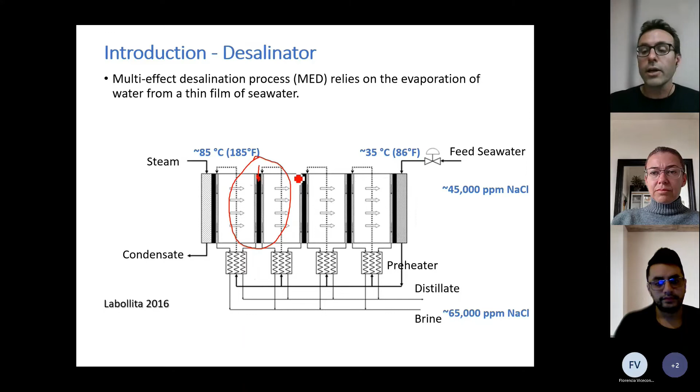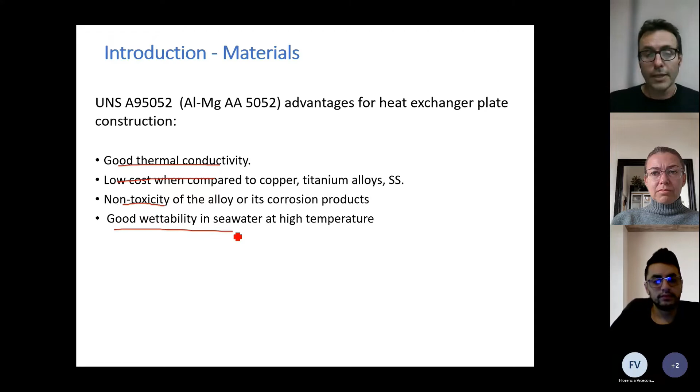And the alloy selected, besides being corrosion resistant, must have good thermal conductivity, so it can transport this latent heat of evaporation. It must have a low cost, especially when compared to other candidate alloys. The corrosion products cannot be toxic because you're supposed to be able to drink this water at the end of the day. And it must have good wettability in seawater at high temperature, right? Because this film of distillate and brine must be stable. So this aluminum fulfilled all those requirements.

And there were also some favorable papers that said, considering different aluminum alloys, it had the highest resistance to seawater corrosion, especially because it has no copper. Aluminum doesn't like copper in terms of corrosion. It has a lower amount of magnesium compared to alloy 5083, which has a higher strength. The lower amount of magnesium means this precipitate doesn't form, and that's good news because that precipitate, in some cases, causes intergranular corrosion.

The feed seawater was going to be deaerated. That is good news for aluminum. And considering all these details of the material, the fact it doesn't have much magnesium, if you go to the literature, it has good performance in service experience and pilot plants. But the question still was, what about all the crevices that this desalinator will have? Because each one of those plates I mentioned in the first slide was connected to the other one by gaskets, and all those gaskets form crevices on the material. And when we went to the literature, we couldn't find any results for crevice corrosion of aluminum at high temperature. And when you have an unknown, all of us who did a PhD know we have an opportunity.

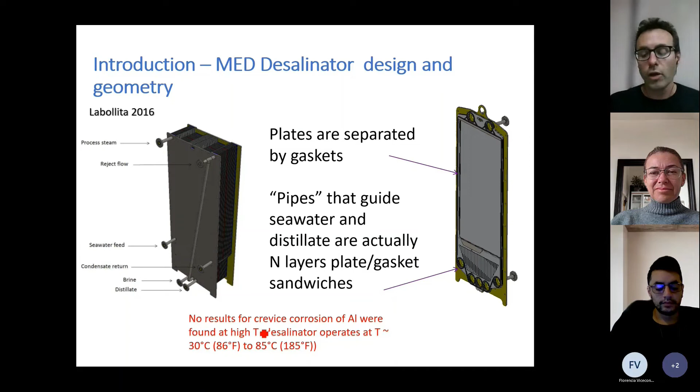So the focus of this research project was tailored to find the effect of those gaskets that form crevices on aluminum corrosion. To do that, we did some cyclic potentiodynamic experiments, and our sample was made specially so that it mimics the service condition. We used O-rings to simulate the gaskets. Those O-rings were fixed to the aluminum plate. The aluminum is here, and here you have the crevice. Here, and here you have the crevice. Then you have a nut, which is tightened with a bolt here. And if we are careful and measure this distance, and it's always the same, then you have the same severity of the crevice each time.

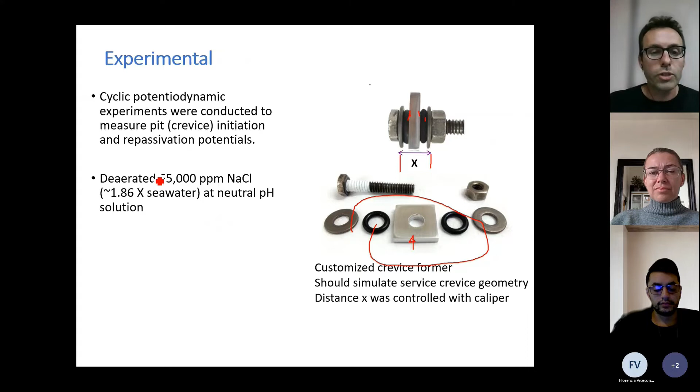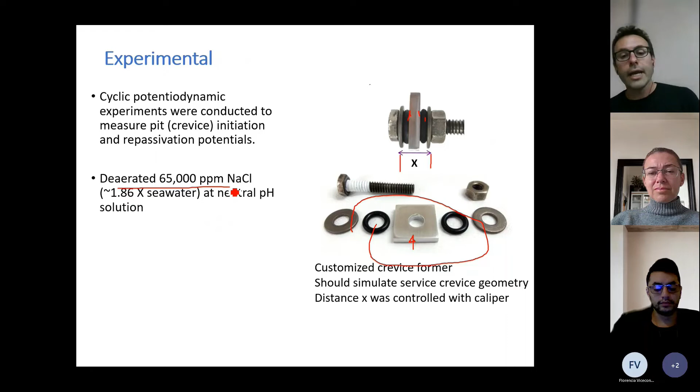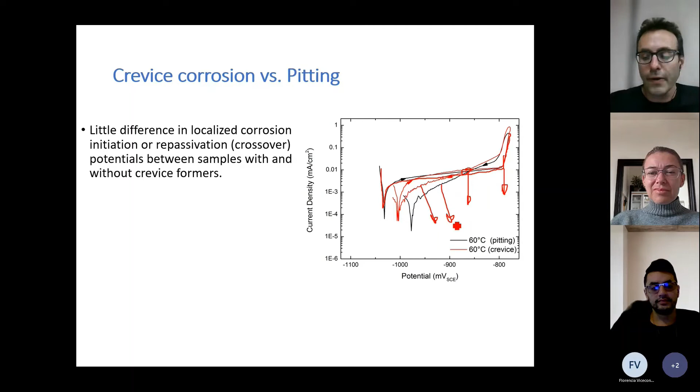And something that is apparent in the experiments we did is that there was very little difference in localized corrosion initiation or repassivation potentials between samples that had or did not have a crevice former. With crevice would be the red lines, and without crevice would be the black lines. And I'm sorry I used red and it all looks bad right now. But the takeaway point from this slide is that with or without the crevice, the electrochemical behavior is very similar.

So when we looked at the samples in the scanning electron microscope, what we saw is in the figures here at 30, 60, and 85 Celsius. After a cyclic potentiodynamic test, which is a very harsh test where you are polarizing your sample at a very high potential, what we see is initiation, but just at the boundary between the end of the crevice and the environment. So we didn't see any very big localized attack underneath the crevice, which was again good news for us.

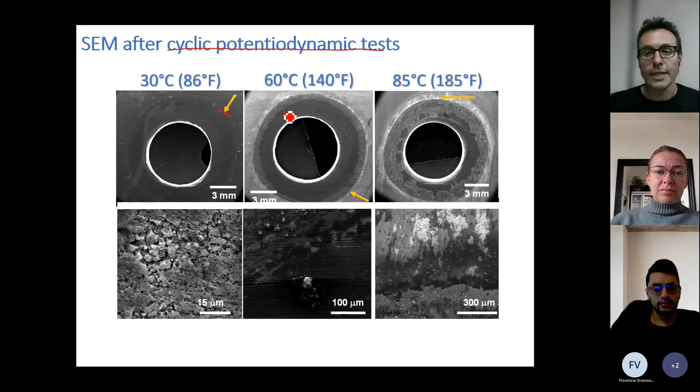So bad things happen with aluminum. I said aluminum doesn't like copper. So what we did was on purpose, we added some copper, just 5 ppm, and did the experiments under aerated conditions. And what we saw is that even at the open circuit potential condition, when you have copper and you have air, the open circuit potential goes all the way up to values close to the breakdown potential, measured potentiodynamically.

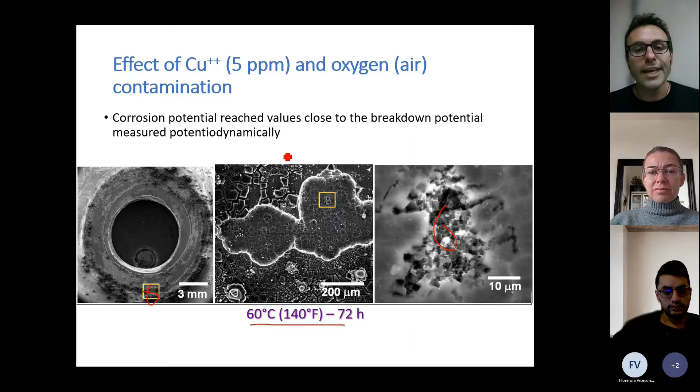And if you go and take your sample and watch it in the scanning electron microscope, what you see is what we show here. So we have attack underneath the crevice, and we see crystallographic pits here. And this was done at 60 Celsius in 72 hours. So the takeaway point from this slide: don't let copper ions get in contact with aluminum. Aluminum doesn't like copper ions.

So now, summing up all our results on crevice corrosion and pitting corrosion resistance versus temperature, what we see here is that pit initiation and crevice initiation potentials are very similar and both of them decrease with temperature. Repassivation potentials occur at lower potential than initiation, and the hatched band here, those rectangles, represent the range of open circuit potentials measured during a 72 hour period.

So a common rule for predicting crevice corrosion or pitting corrosion is to compare your open circuit potential, which is here, with the critical potentials for initiation and repassivation. So what we see here is that at 30 and 60 Celsius, the plant should be okay. And when we go up to 85 Celsius, the open circuit potential is on the same order of the repassivation potential. Still smaller than the initiation potential, but on the same order as the repassivation potential.

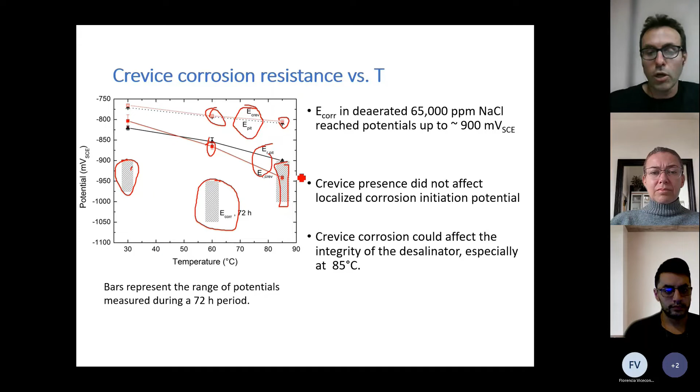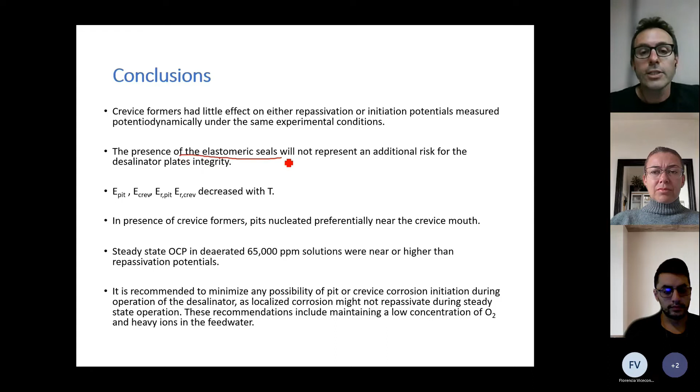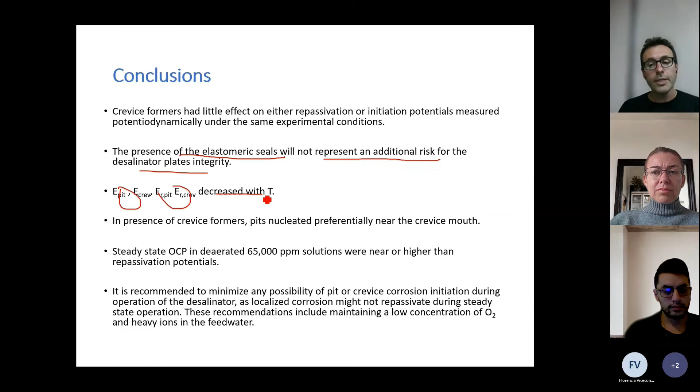So the conclusions of this study were, first, the crevice formers had little effect on either repassivation or initiation potentials measured potentiodynamically under the same experimental conditions. So in practical terms, this means that the elastomeric seals will not represent an additional risk for the desalinator plates integrity. Localized corrosion initiation and repassivation potentials decrease with temperature as expected. So when you are up in temperature, localized corrosion is easier to initiate and more difficult to repassivate.

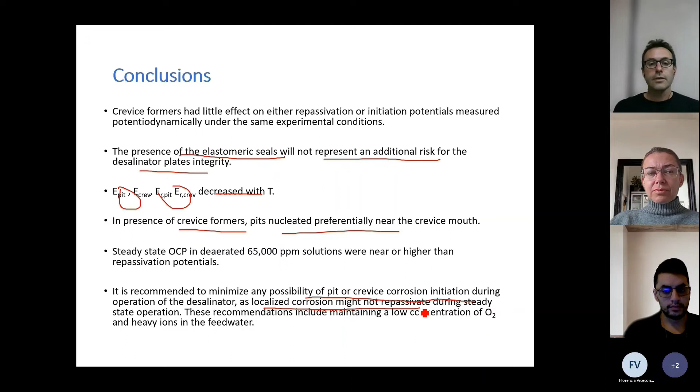And when we have crevice formers, the pits preferentially nucleated near the crevice mouth, right? So our recommendation is to minimize any possibility of pit or crevice corrosion initiation during operation of the desalinator, because localized corrosion might not repassivate during steady state operation. So essentially, take a close look at heavy ions presence in the feed water of the desalinator, and also maintain a very low concentration of oxygen. So I think those are the major points, the highlights of this investigation.